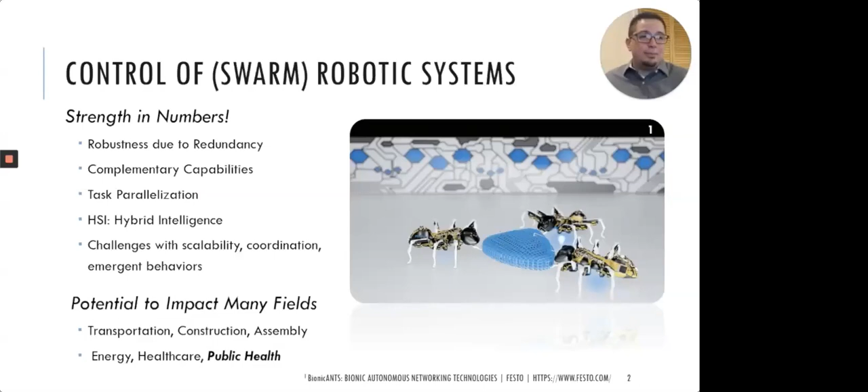In this particular work that I'm going to be presenting today, we're addressing the question of how do you manipulate a swarm of robots. And we try not to attempt to control individual robots with this work.

Instead, what we're going to do is set an objective for the collective of robots. And the individual robots then coordinate their motion with one another in order to achieve this collective objective.

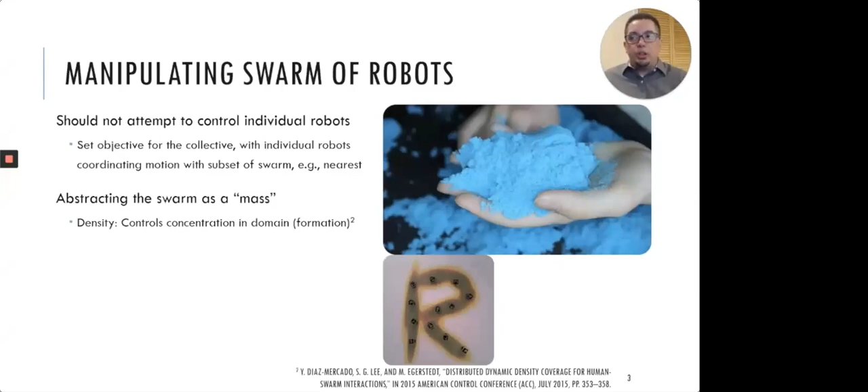We're grouping them together in some way in order to achieve different shapes. One approach to think about how you control these particles is by setting a density, the density of these particles, or in other words, you control the concentration of them inside of the domain. And in so doing, you might be able to achieve different formations like we see on the diagram here.

This is an approach that we have taken in the past. In this work, we're going to take a slightly different approach where we think about the boundary itself as the thing that we get to control. Kind of like taking the sand and then rolling it up into a ball, and actually being able to take this ball and move it around.

This is going to allow us to control the overall position and scale of the swarm. We're going to be using coverage control in order to do this, as it provides a scalable mechanism to influence the swarm of robots with these abstractions for the density and concentration of the robots, and the boundary, or the position and scale of it.

To formalize this a little bit, the coverage control problem over time-varying domains is the one that tries to minimize this modified locational cost H, which I will explain in a moment. It's modified in the sense that we are taking a time-varying convex domain D as the domain that we are attempting to cover. Inside of this domain, we're going to be defining a time-varying density phi.

It maps points in the domain and time to positive numbers. The larger these positive numbers are, the more important certain points in that space are. And the more important points in the space are going to drive the robots to concentrate around those points.

The objective is to minimize this cost with respect to the position of the agents. We're going to denote Pi of t as the position of the ith robot at time t. Whenever we see a position vector P without a subscript, that means it is the ensemble vector of stacked positions for the different agents, a long vector with all the positions.

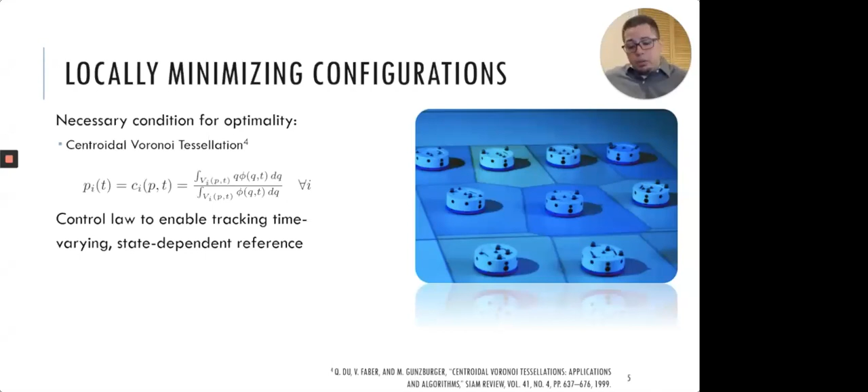Now, intuitively, from a controls theoretic standpoint, if we're just tracking our time-varying reference, then we need a few building blocks into our controller. First one is tracking feedback. This is pretty standard. Second one is tracking feed-forward. This is going to account for the time variations that we have from the domain and the density, and are going to allow us to then maintain this centroidal Voronoi tessellation once we achieve it.

Coordination among the agents is going to allow us to take into account the state dependency and the Voronoi tessellation that affects the domain of integration in order to, again, maintain this time-varying domain and density's centroidal Voronoi tessellation.

The coverage control law that we propose is given by the following expression. And it looks similar to expressions that we have proposed in the past, but there are nuances that are hidden here within the different partial derivatives that are unique to the problem that we're addressing here with the time variables.

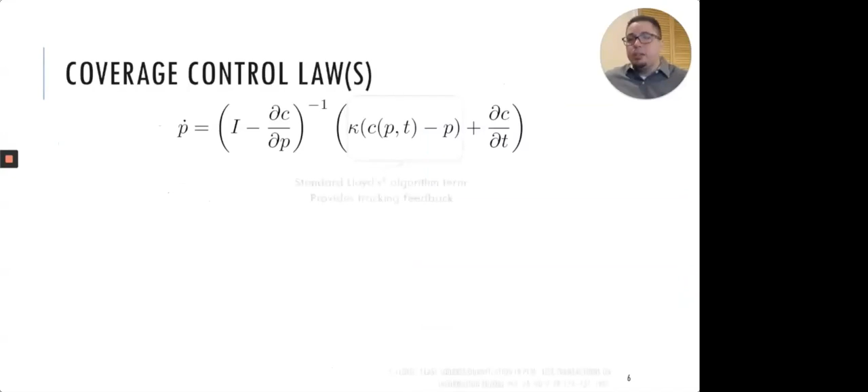But we can see that all the building blocks that we required in order to achieve this, maintain these centroidal Voronoi tessellations, are present. We have a standard tracking feedback term that actually looks a lot like the standard Lloyd's algorithm that's very well used in coverage control problems.

We have a feed-forward term, the partial of the centroids with respect to time, that accounts for the time evolution of these domains and the densities. And we have a matrix that accounts for state dependency here and provides coordination among the different agents.

In previous work, we've shown that this matrix can actually be swapped out with truncated versions of the Neumann series expansion in order to set the desired level of coordination among the agents and decentralize this control law.

For example, taking only the two terms in the Neumann series expansion would only require coordination between the nearest neighbors in the domain. And so in the paper, we show that the control law with the updated feed-forward terms and expressions are still able to provide local exponential tracking of the centroidal Voronoi tessellation.

To account for time-varying domains, we have the following proposition in the paper. It says that if we know the normal velocity of almost every point on the boundary of the time-varying domain, then the feed-forward term is given by the following expression.

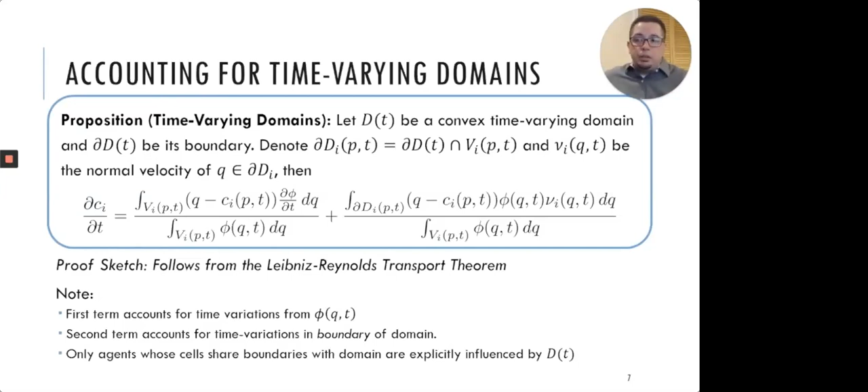The agents on the interior are not explicitly affected by the time variations. They're implicitly affected through the coordination between the different agents. And this result follows from application of the Leibniz-Reynolds transport theorem and a lot of algebraic manipulation.

So the scalability of this coverage control scheme was addressed in the paper as well. What we find is that under uniform density and 2D convex polygonal domains, the algorithmic complexity for our approach is actually constant in time.

In the paper, we show that we can find closed form analytical expressions for the case of uniform density, for every single term in the control law. These closed form analytical expressions are a function of the position of the neighboring agents in the swarm. In order to find these neighboring agents, we need to construct a partial Voronoi diagram.

There exist methods that allow us to compute these on average with a time complexity that depends on the number of neighbors.

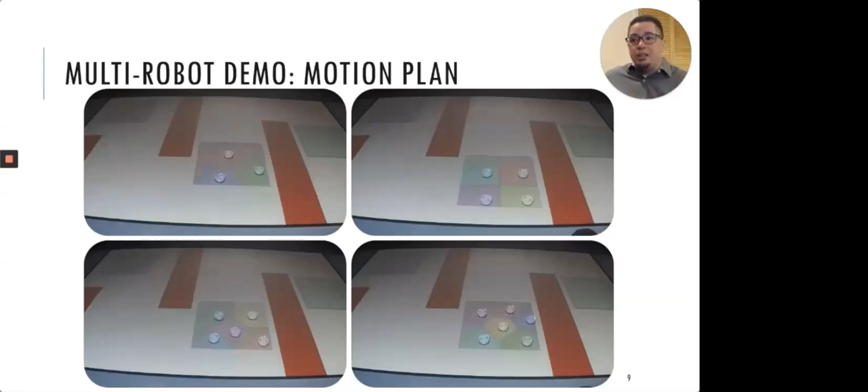What we see here is that through the control law and coordinating the position with the motion from the different agents, the agents are able to reconfigure as necessary in order to maintain optimal coverage and track the time-varying domain. In so doing, we're controlling the entire swarm of robots without having to worry about the individual robot in the space, and we managed to transport them from the left to the right while avoiding the red obstacle regions.

Here we are directly projecting the obstacles, domain, and everything else onto our workspace through an overhead projector.

We asked him to move the domain from the left to the right while avoiding the red obstacle regions. Sometimes he doesn't do very well and he ends up colliding with these.

And so we've infused the domain with the ability to avoid these obstacle unsafe regions.

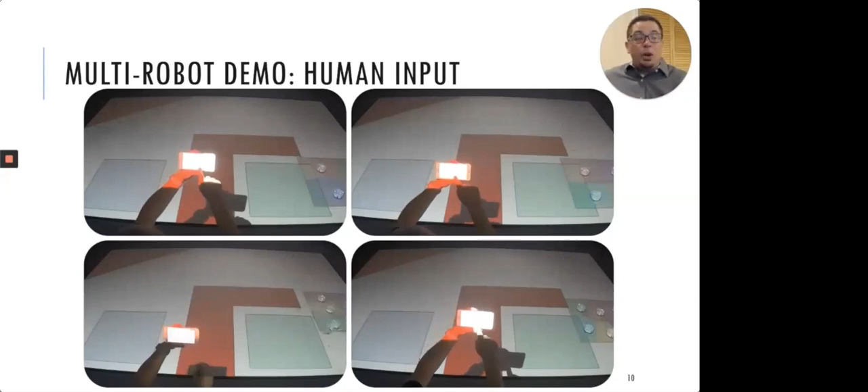This brings up an interesting feature: because the robots are always occupying the interior of the domain, it automatically provides a level of guaranteed safety for the robots, so that the robots are not going to go into the unsafe areas because the domain itself is not allowed to go into the unsafe areas.

So to conclude, we presented a scalable algorithm for manipulating a large team of robots via coverage control over time-varying domains, providing exponential tracking results to the locally optimal configurations.

We've shown that under uniform density, there are closed form expressions, which leads to a constant time implementation even for large teams of robots. The punchline here is that a time-varying domain and a time-varying density can serve as exogenous inputs to manipulate the swarm into executing motion plans or incorporating human inputs.

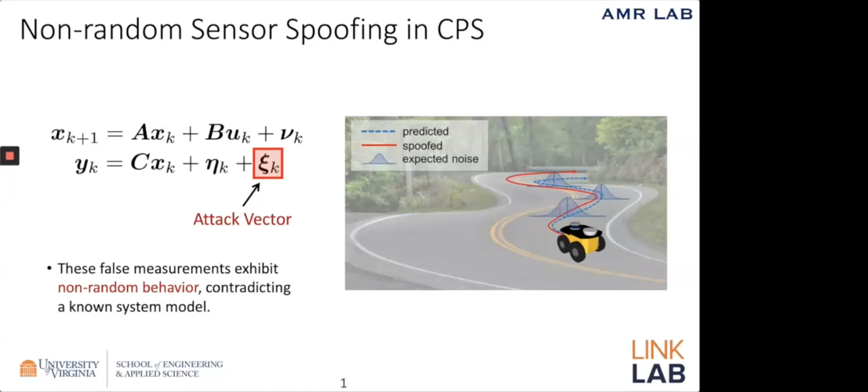Specifically, we leverage 2 tests to check for inconsistent behavior by monitoring the residual, that is the difference between measurement and the state prediction. The first monitor uses the Wilcoxon sign rank test to monitor whether the sequence of residuals are symmetrically distributed in zero mean, while the second monitor, that is a serial independence runs test, determines if the incoming residual difference sequence contains non-random patterns which may not be detectable by the Wilcoxon test alone.

In this video, we are showing an example of an experiment conducted on a UGV that is tasked to perform a square trajectory, avoiding the red regions while monitoring for cyber attacks with a Wilcoxon serial independence test and a well-known bad data detector. At some point, an attack on the IMU sensor appears, pushing measurements to one side and making the UGV believe that it needs to correct toward the left, thus entering that undesired red region.

However, as you can note on the top graph, the Wilcoxon test in this case is able to detect non-random residual behavior, resulting in an increased alarm rate. To hear more about this work, please visit our poster. Thanks.

Hello everyone, and welcome to my presentation. My name is Harshat Kumar, and in this video, I will be talking about the navigation of quadratic potentials with star obstacles. Path planning involves 2 components: reaching a specified target goal from a start configuration and remaining in the free space or avoiding obstacles along the way.

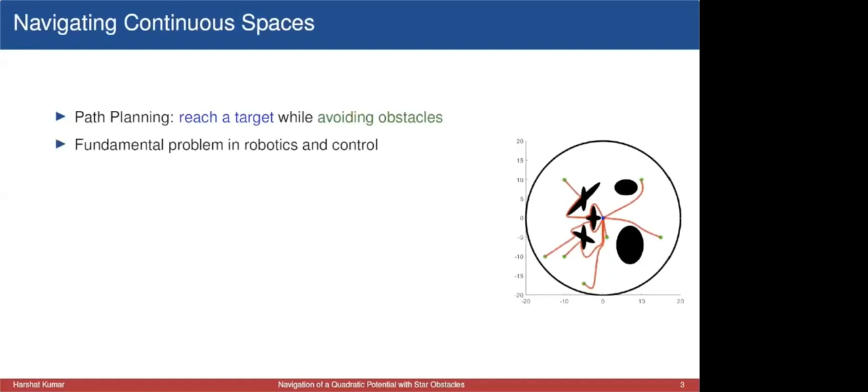Our approach is informed by the artificial potential approach. Artificial potentials combine an attractive potential to the target with repulsive potentials from the obstacles. The agent follows the gradient field generated by this artificial potential to reach the target.

This approach is popular as it can be implemented without global information and with smooth trajectories which are favored for bounded torque actuated robots. Unfortunately, artificial potentials are known to be incomplete, as the agent might converge to a local minimum of the potential rather than its goal.

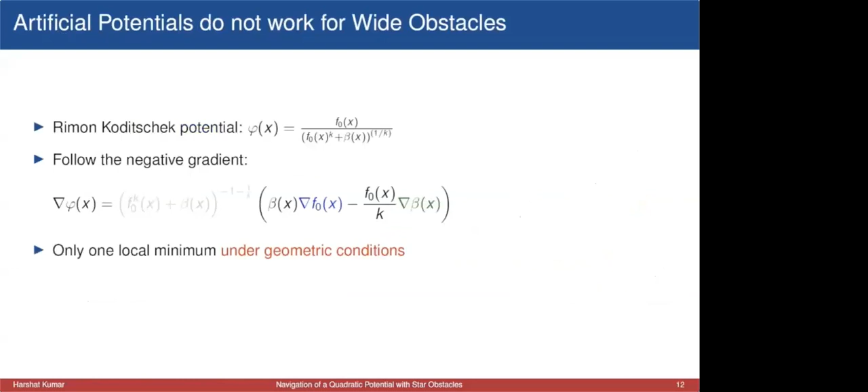Subject to certain geometric conditions, the Rimon-Koditschek potential can be proven to have exactly one local minimum at the agent's target. Spherical obstacles satisfy these conditions, but they lead to over-conservative obstacle estimates. When the obstacle is estimated by wider shapes, such as ellipsoids, a local minimum forms adjacent to the obstacle.

In fact, due to the quadratic form of ellipsoidal obstacles, the proposed dynamics are simpler than they appear. A closer inspection of these simple dynamics allows us to extend these convergence results beyond ellipsoidal obstacles.

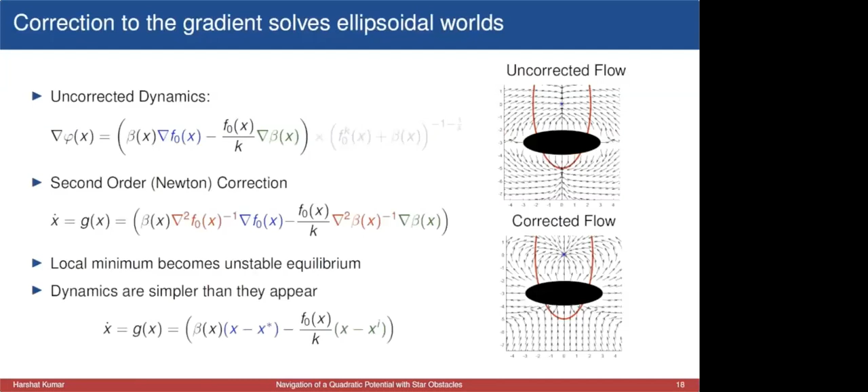Notice that x minus x star denotes the direction from the agent to the center of the quadratic potential. Similarly, x minus xi denotes the direction to the center of the obstacle.

As such, we propose the same simple dynamics can be applied to a more general class of obstacles called star obstacles. Star obstacles are defined by a center point such that the line segment between the center point and any other point is contained in the obstacle. In fact, all convex obstacles are star obstacles, with any point being a center point.

In this work, we proved that from any starting configuration, the agent will reach the goal without colliding with the star obstacles. Thank you for attending my presentation, and I look forward to speaking to you in detail during the interactive session.

Hello and very welcome to this short presentation on the model-based cascaded control concept for the bionic motion robot.

The bionic motion robot, which you can see on the left here, is a quasi-continuum manipulator consisting of 3 segments, actuated by pneumatic bellows. So it is a pneumatically driven robot, and it is actuated by pairs of bellows.

The title of the paper says, I will quickly present a model-based cascaded control concept, so as well the control concept, in very brief form in this short presentation.

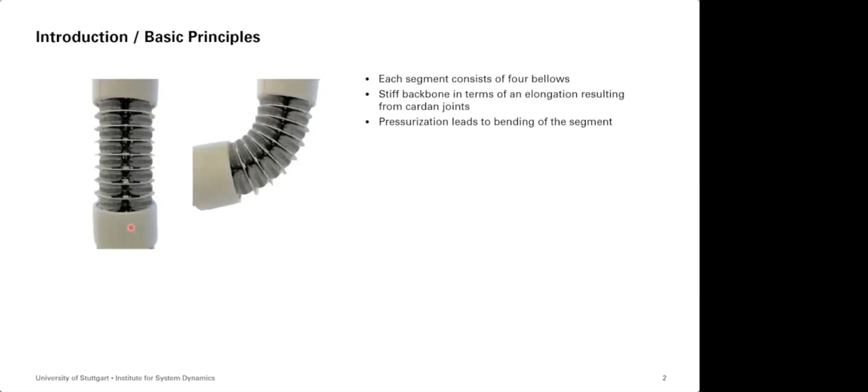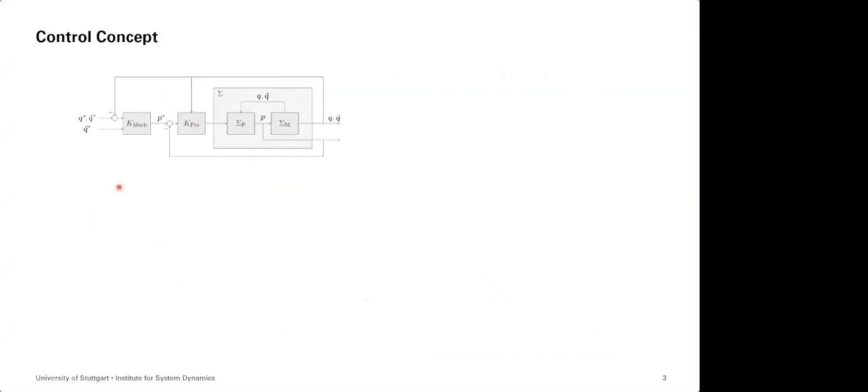Regarding the control concept, we used a cascaded control concept with an inner pressure control loop and an outer mechanical control loop, and optionally also a force-free control was implemented, which you can find in the paper.

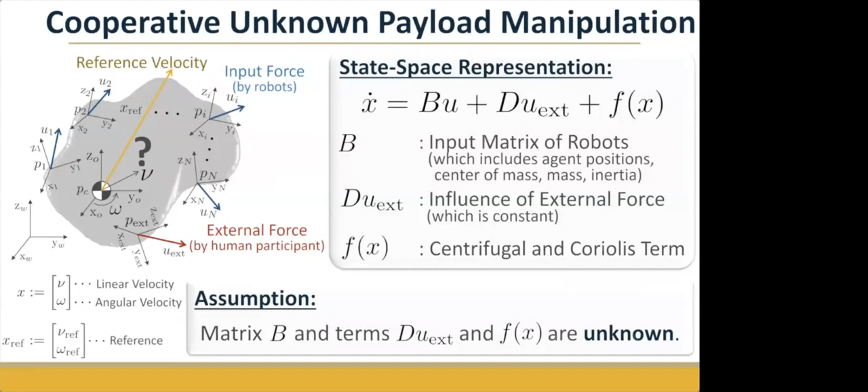This paper presents a novel distributed optimization algorithm based on primal-dual gradient dynamics. In general, we need to know the B matrix to apply the primal-dual gradient dynamics for this type of optimization problem.

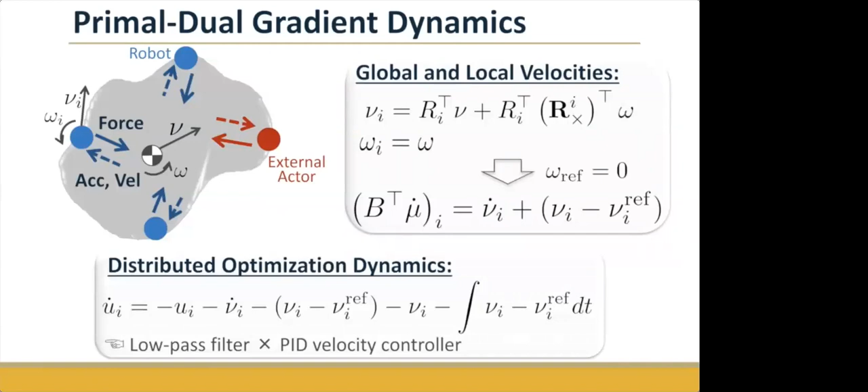However, the cooperative payload manipulation system has a suitable relationship between global and local velocities. By virtue of this suitable property, we can obtain fully distributed optimization dynamics with an additional mild assumption on the difference in angular velocity. Our manipulation scheme amounts to implementing a combination of a low-pass filter and a PID velocity controller.

As a main result, local exponential convergence of the present dynamics can be proved. Finally, we demonstrated the effectiveness of our proposed approach through numerical simulation. We can confirm that the object velocity converges to the reference, even after the decrease of the number of active robots.

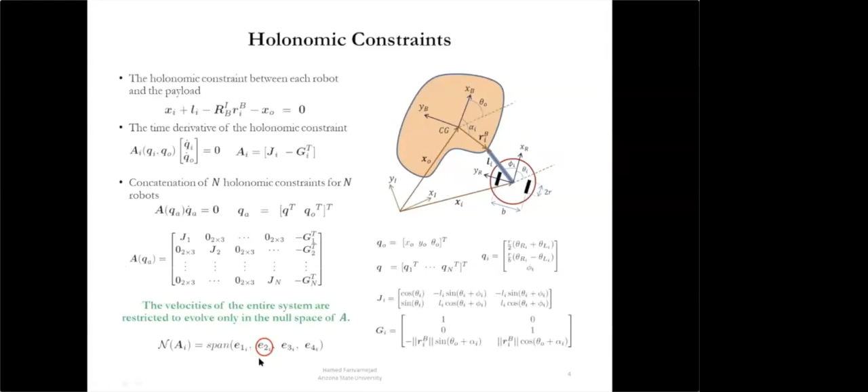This null space is spanned by four unit vectors, and among all these, E2 has a circle, because when we want to design the desired velocity for each robot, we use just E2 to design this desired velocity. When we design the desired manifold motion with this equation, we can prove that with this desired manifold, all the control objectives are entirely satisfied.

With this linear parameterization of the robots, we can design a totally decentralized control law and adaptive law, and we can prove that the closed-loop system is globally stable, and all the manifold parameter errors converge to zero with this control law.

We did a simulation in V-REP with eight robots, and we can see that the payload here is transported to the goal with a desired constant direction without significant rotation.

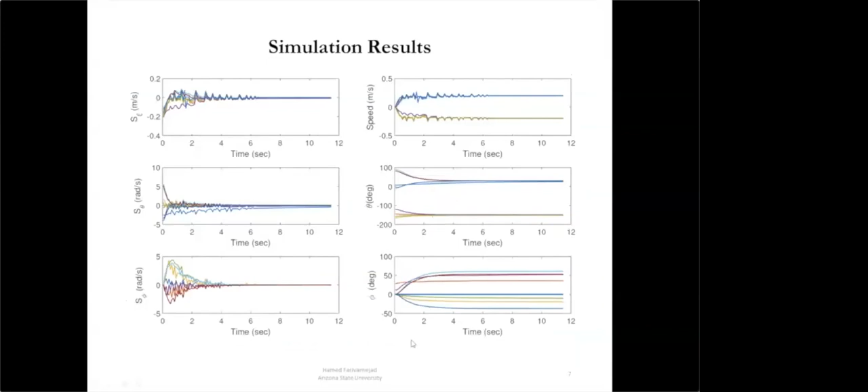Backing up a little bit, the goal of multi-target tracking is to estimate the state of a given dynamical system. This is usually performed in two steps recursively: uncertainty forecasting and information fusion.

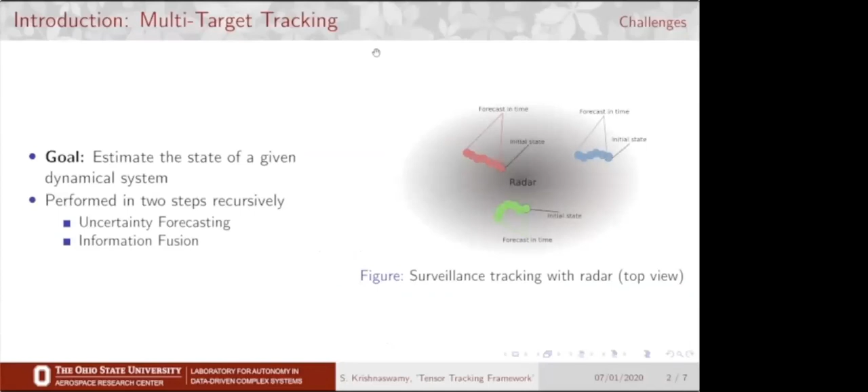The problem with the latter step is that targets often do not voluntarily reveal their information regarding the state, and we need this information to determine which measurement to use for which target to perform a state update. This is complicated by the presence of clutter and compounded by the scale of the problem. This is known as the data association problem, and there are many solutions that exist for it.

I'm going to be focusing on one here. To formalize this a little bit, this is the multi-target nonlinear motion model we're using in this paper.

I want to draw your attention to three things here. First, the number of targets, which is more than one. The state of the object is given by a nonlinear process model. And finally, z-tilde of p, which is the measurement needed to compute the state.

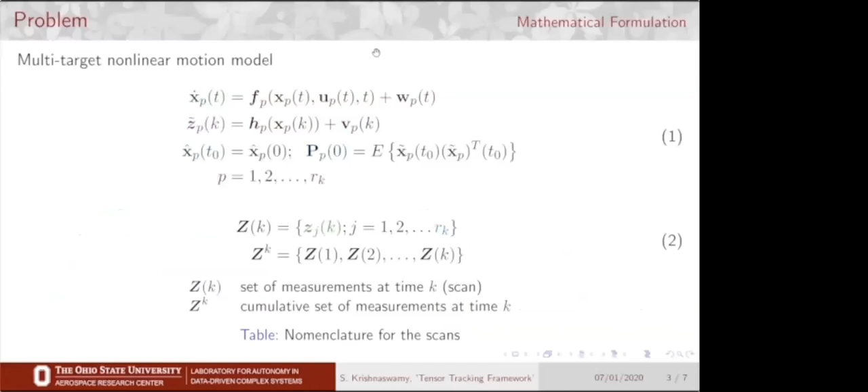But what we get in a practical scenario is zj of k, and we need to reconcile these two somehow, and data association is how we do it. The way data association is performed in this paper is by using DJPDA, which is a tensor framework that was developed and published earlier. I'm not going to go deep into this one, but I just wanted to mention that.

The experimental design here uses a fleet of turtlebots. The objective of this case study was to control the complete tracking problem and to test the DJPDA framework already published, to see how it fares in a real-world scenario with clutter and higher data frequency.

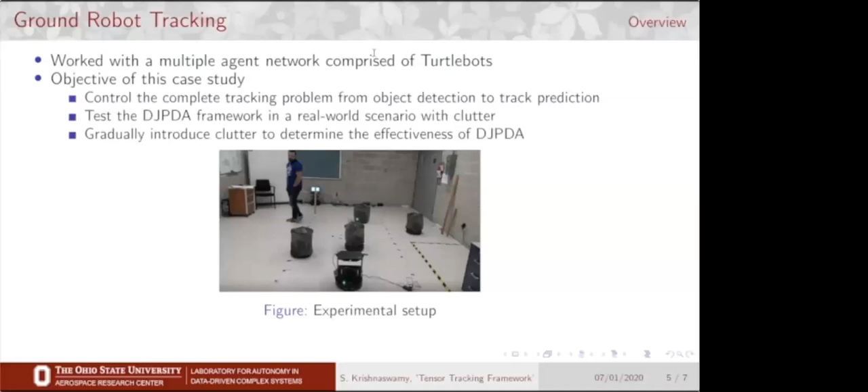The experiments were conducted in a gradual manner, starting with one agent. Complexity was added by including additional agents with the same process model, an undesired object with a different process model, clutter with an unknown trajectory, and random interference using humans.

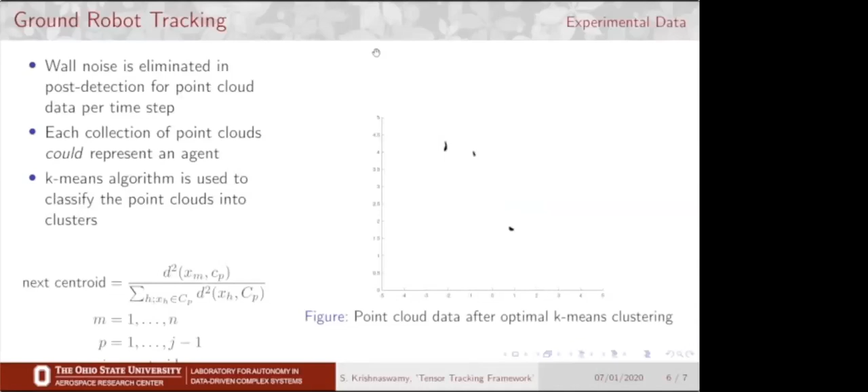We also did some simple data cleaning. We eliminated wall noise because we knew the wall was at a known position. We also took into account the point clouds and ran a k-means clustering algorithm to determine what position each point cloud represents, which would be a turtlebot position.

Once a rank is set, that time is also set, and the uncertainty reduces with the number of ranks. Together, this gives us an additional tuning parameter.

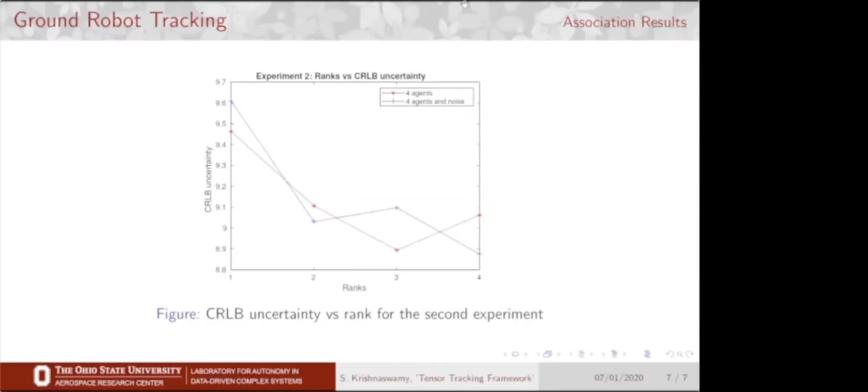First let's define material handling, which is the use of manual, semi-automatic, and automatic equipment to transport, store, and handle various materials. To successfully assist, humanoids should be able to interact with common materials-moving equipment such as carts, dollies, and wheelbarrows, and that's what we're going to focus on here.

There are a lot of applications within disaster cleanup and agriculture. We will be using the DRC Hubo robot, which was developed during the DARPA Robotics Challenge.

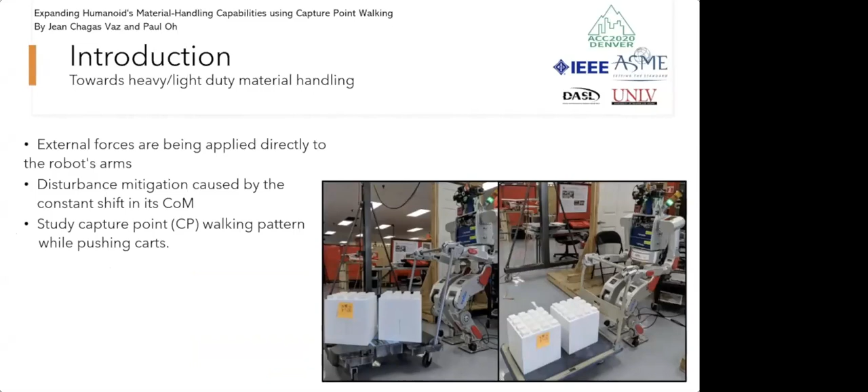The first thing we have to consider when talking about pushing a cart is the external forces. For the walking pattern, we have chosen capture point.

Here I have a little bit of the system integration. DRC-Hubo was equipped with 4 force-torque sensors on the ankles and wrists, and PODO is just the overall software that communicates between those sensors.

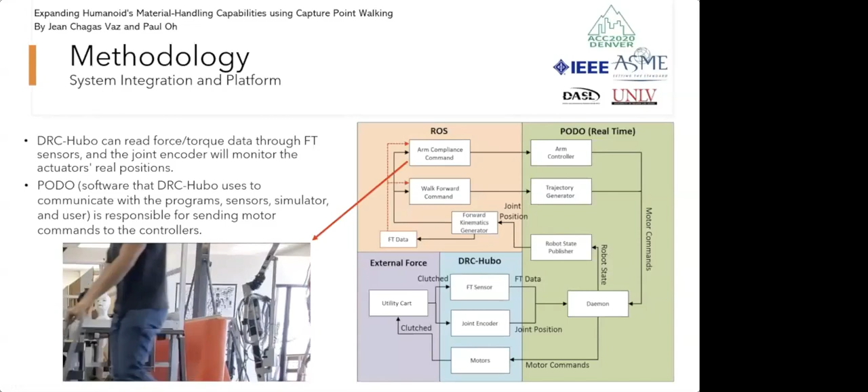By observing humans pushing carts, we've noticed that arm compliance is quite a must if you want the robot to push the cart and walk at the same time. For that reason, we have applied arm compliance based on friction.

To solve that problem, we had to ensure the desired wrist position for the high dimension nonlinear robot arm, and we used a traditional feedback linearization based technique.

The robot is capable of keeping stable walking even though the cart is constantly shifting its center of mass. You can also observe the arms are indeed using friction compliance to push this cart.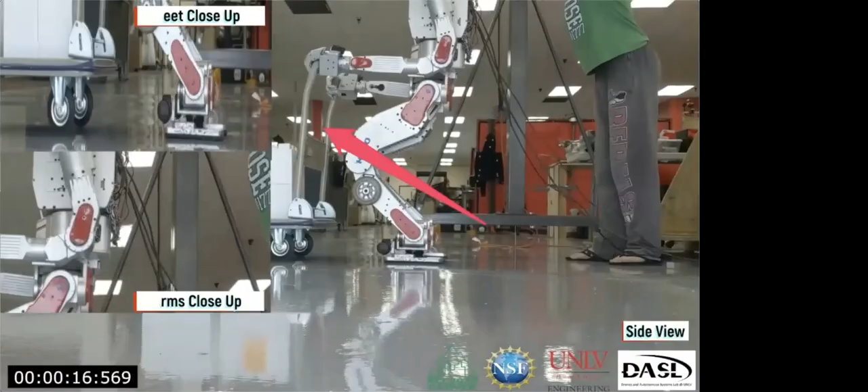This is one of the carts that we used. There was another cart where the handle is 90 degrees and upwards, and we're going to show that right here. The capture point pattern stabilizes itself as the walk goes, as you can see on the overall plot. Same thing can be seen on the Y ZMP.

The takeaway from all of this is that cart pushing and material handling remain an open problem. The robot-object interaction easily destabilizes walking, so this problem has to be solved before humanoids are deployed in distribution centers and disaster cleanups. We have successfully demonstrated capture point walking with arm friction compliance, so the next logical step is whole body coordination, and that is coming up soon.

Hello, I am Ryan Krauss, and I am really interested in low-cost, real-time feedback control experiments. That has led me to publish some previous work on using Arduinos for real-time feedback control. But I also really love Python and would love to be able to use it in real time to do my control law calculations. I think it gives me a lot of power and flexibility.

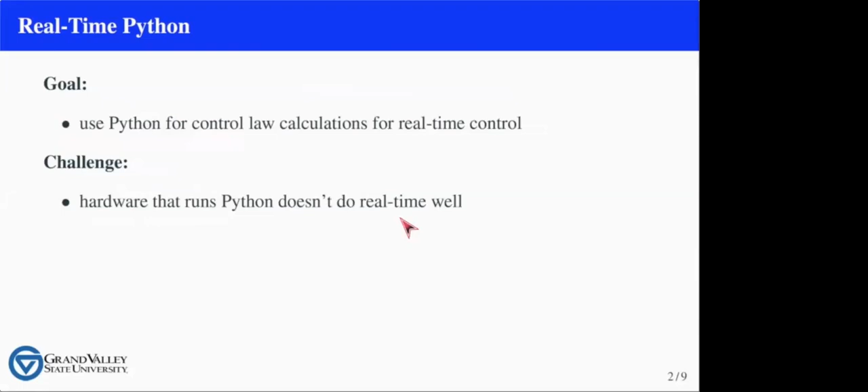The primary challenge I run into is that hardware that runs Python does not generally do real-time stuff very well. So in my previous work, this has looked like an Arduino connected to a laptop, and the laptop does the control law calculations and sends information to and from the Arduino over USB. The Arduino controls the timing and interacts with the plant, reads the sensors, and sends the actuator commands using digital to analog conversion.

In this work, we're switching from a laptop to a Raspberry Pi, and we're switching from serial to I2C as a way to reduce latency.

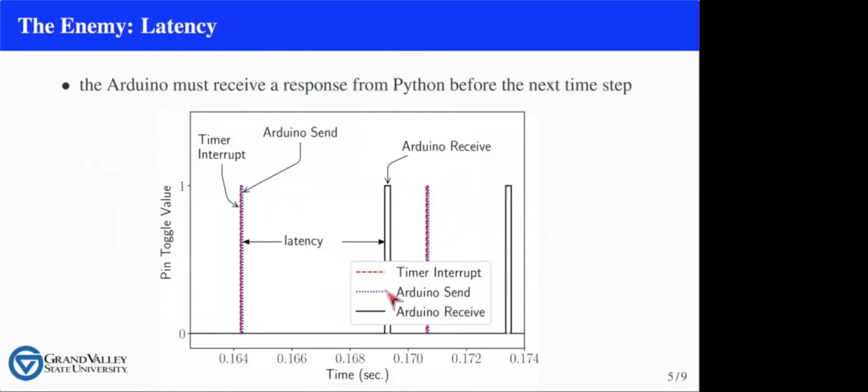In previous work, Python essentially sits waiting for a response from the Arduino. As soon as it gets the sensor values, it does its control law calculations and sends out a new set of commands. The Arduino waits for a timer interrupt, sends those commands to the plant, and then sends data back to Python. The primary bottleneck in this situation is how long it takes from the time the Arduino sends sensor information until the time it receives the next batch of actuator commands.

That latency can average around 3 milliseconds and be as high as 5 or even slightly over 5. That bottleneck limits this approach to roughly a 200 hertz digital control frequency. So reducing that latency was the primary goal of this work.

It basically came down to serial having latency that I don't seem to be able to get rid of. So switching over to I2C and using 2 different Arduinos allowed Python to ask the timing Arduino when the next timer interrupt event occurs. In this communication cycle, we're essentially doing the same things, but doing it over I2C has much less latency than the serial-based approach.

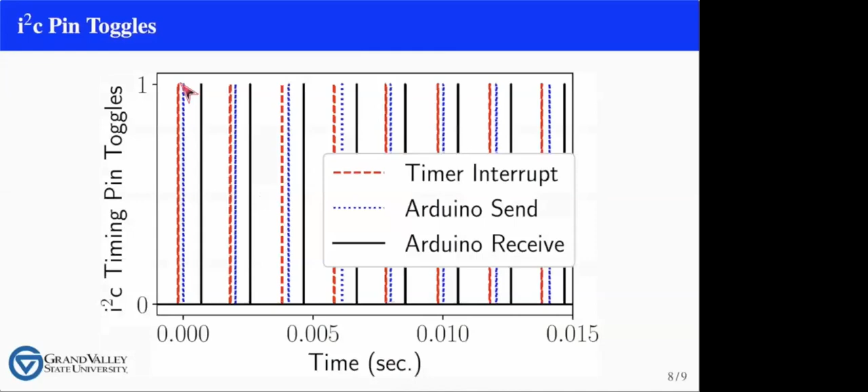Using pin toggles from the Arduino combined with an oscilloscope, we measured the latency of this approach in the same way we had done with the USB serial approach, and we find that we've reduced that latency by roughly a factor of 3, which should make it possible to do real-time feedback control experiments using Arduino plus Raspberry Pi at roughly 500 to 800 hertz.

Hello, my name is Sean Brennan, and I'm pleased to present this paper, Energy-Aware Path Planning for Skid-Steer Robots Operating on Hilly Terrain. The lead author of the paper is the recently graduated master's student, Veronica Grunge, and my co-authors are Jesse Pentzer and Karl Reichard.

The problem we are seeking to solve in this work is represented by the human challenge of climbing a mountain. The minimum distance path is a straight line toward the peak, whereas the minimum energy path is often complex, longer in distance, and generally seeks to minimize changes in elevation.

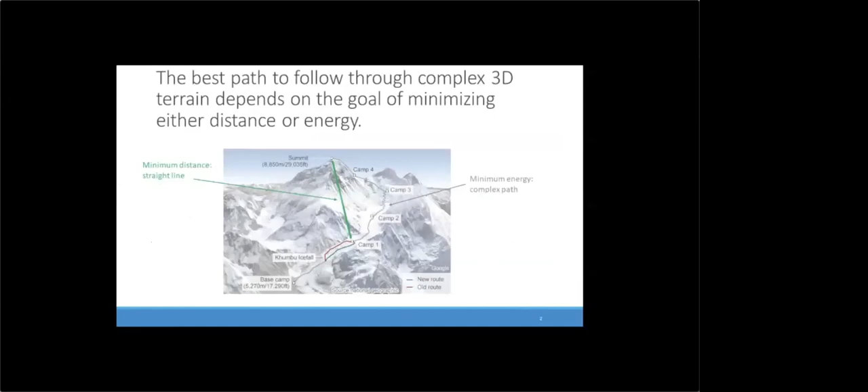While minimizing distance from a start to end point is a relatively trivial task of connecting straight line segments, the calculation of minimal energy paths is made difficult for off-road skid steer vehicles due to the calculation of slope energy and spin-in-place energy in the presence of deformable or slipping soil surfaces.

Prior work by the authors shows means of modifying the two-wheel unicycle robot dynamics to include skid steering effects. These dynamics are based on the instantaneous centers of rotation rather than the center of the tire or treads.

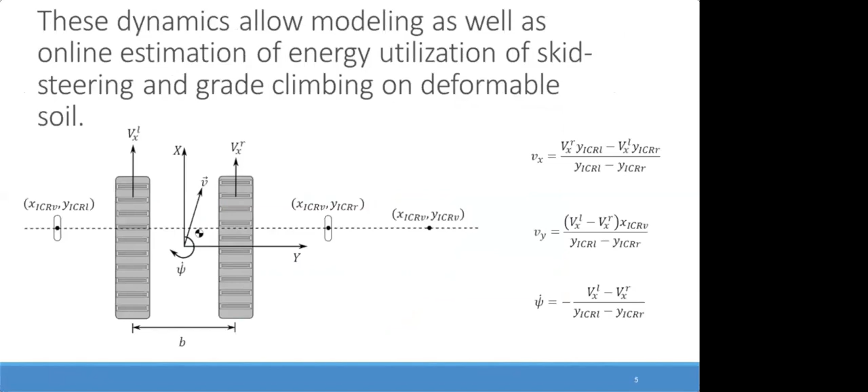This modification allows straightforward modeling as well as online estimation of energy utilization of skid steering and grade climbing on deformable soils. The problem of finding the minimum energy trajectory in hilly terrain is a non-convex problem, particularly with changing soil frictions. To obtain solutions, this work uses the sampling-based model predictive optimization, or SBMPO algorithm, with models of terrain topology and soil parameters to develop energy-aware path plans.

The results show that using homogeneous soil navigation with energy constraints predicts paths that follow ridge contours, whereas straight paths are preferred if the soil types are improving energy costs.

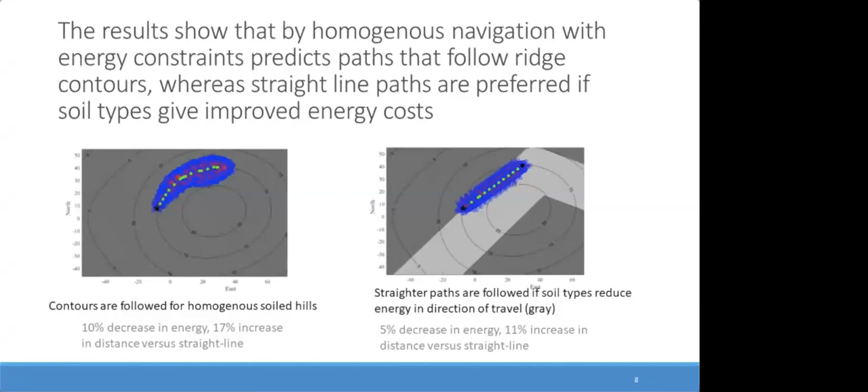In the homogeneous soil case, we observed a 10% decrease in energy, but with a 17% increase in distance versus straight line driving. In the changing soil case, we observed a 5% decrease in energy, but with an 11% increase in distance versus straight line driving.

Future work includes more aggressive topologies, speeding up the algorithm, which is currently not real-time, and experimental testing of the algorithm with real robots. If you have questions, I'd be glad to discuss in the breakout session, or you can email me, Sean Brennan, at this address.

Hello everyone, my name is Yuan Gao. I'm a PhD student from the Trace Lab at the University of Massachusetts Lowell. In this presentation, I will talk about our research on impact-aware online motion planning for fully actuated bipedal robotic walking.

This work is done with Dr. Xingye Da from NVIDIA and my advisor, Dr. Yan Gu. Real-world operations in complex, dynamic environments demand online planning.

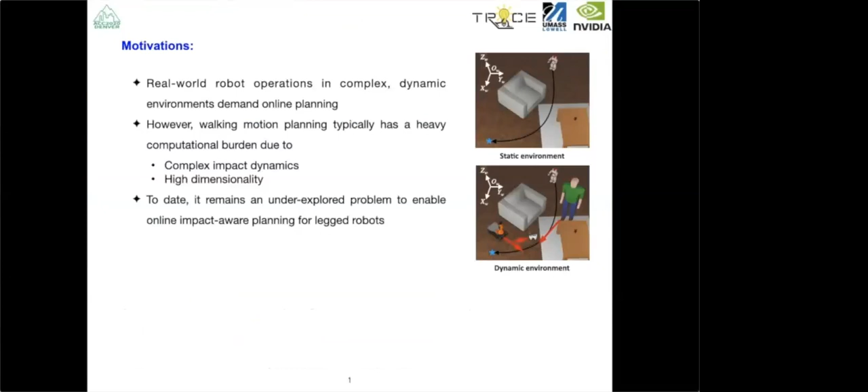However, the computational burden of the associated walking motion generation is heavy because first, walking is naturally a hybrid dynamic process involving nonlinear state-triggered impact dynamics, and second, a walking robot typically has many joints causing high dimensionality of the robot's state space. Therefore, realizing online impact-aware planning for legged robots remains a challenging problem.

The objective of this work is to develop an impact-aware planning method that generates a desired full-body motion profile in real time for fully actuated walking robots.

Our proposed planning method reduces the computational burden of planning by constructing a keyframe posture library offline. Also, it guarantees that the planned motion respects the robot's landing impact dynamics by explicitly considering the impact behavior.

The flowchart illustrates the proposed planning method, which consists of four steps. The first step is to construct a keyframe posture library. A keyframe posture is a pre-computed kinematically feasible configuration of a walking robot when the foot lands on the ground.

The postures highlighted in the red dashed circles are keyframe postures. A keyframe posture library is a collection of keyframe postures.

The second step of the proposed planning procedure is posture interpolation, which obtains a posture that exactly fits the given footstep. Specifically, we first search for two closest keyframe postures, then we obtain the average posture and use it as the initial guess to obtain the interpolated keyframe posture.

The third step is the velocity assignment, which is the key step to enable our planner to generate full-body motions that respect the robot's impact dynamics. At this step, we assign the desired generalized velocity to the interpolated posture obtained from the previous step.

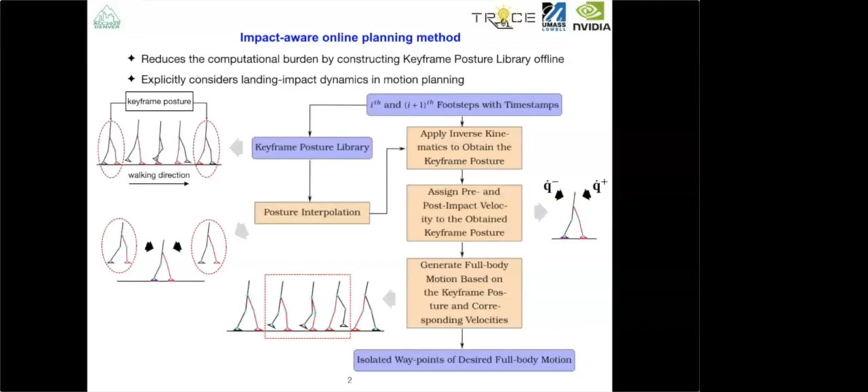In the last step, the planner generates a full-body motion based on the keyframe posture and its corresponding velocities.

We have validated our impact-aware online planning method through MATLAB and Webots simulation of the Darwin OP3 robot. The robot has 20 joints. Our planner is able to generate impact-aware motion of one walking step within 0.6 seconds.

In these simulations, the nominal step duration is about 0.8 seconds. Both simulation results demonstrate the effectiveness of our proposed planner in generating impact-aware motion in real time. Thank you, I'd be happy to take any questions during the post-session.

My name is Antonio Loria. I am with the CNRS France, and I will speak about the decentralized partial consensus controller for non-autonomous vehicles over networks with interconnecting delays. This is a joint work with Mohamed Maghenem from University of California, Emmanuel Nuño from University of Guadalajara, Mexico, and Elena Panteley from CNRS France.

Partial consensus control pertains to the case in which we have a group of robots that are initially far apart, and we want them to converge to a rendezvous point that is not specified a priori.

In doing so, the robots also have to acquire a formation, a geometric pattern, and a desired predefined orientation. Only orientation is predefined. We address this problem under the realistic scenario in which the robots are initially far apart, so proximity sensors are inefficient, and instead the robots use GPS measurements, and they transmit these measurements over a wireless network.

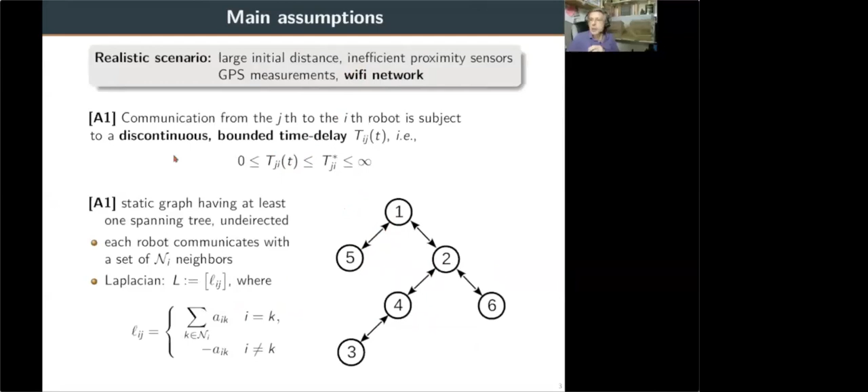This network is supposed to have at least one spanning tree so that every robot receives information from at least a sufficient set of neighbors. Also, because the network is wireless, it induces discontinuous time-varying bounded delays.

The controller to solve this problem is given by these two equations, one for the translation motion and another for the orientational motion. As you can see, the controller contains proportional errors to the consensus errors we see here. These are the states of the ith agent, the actual agent, and these are the states of the neighbor that are received with time-varying delays.

Another term that is crucial in the controller is this one here, which is the product of a function that depends only on time. It's an external function, and this function is supposed to be persistently exciting, so it can be a periodic function, or just some random noise, or any other function that is persistently exciting. The second term is basically some kind of norm, except that it's in a vector form of the error.

So what this term is doing is that it excites the system dynamics as long as the consensus errors are delta away from the origin.

Our main result is to establish uniform global asymptotic stability, and this is very important. This is very different from the literature, in which usually only convergence is established.

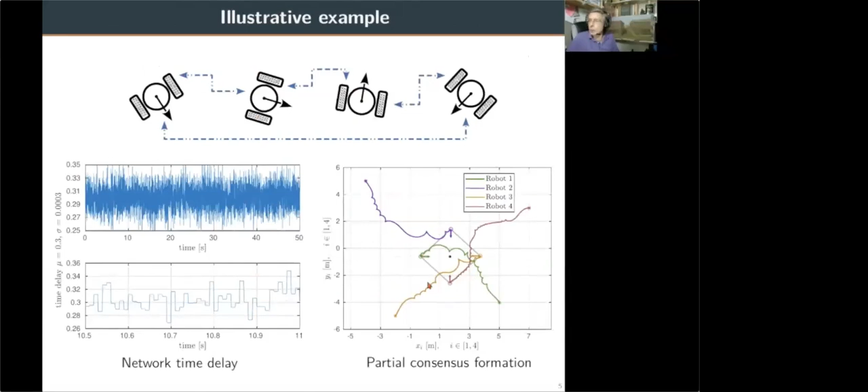We also provide an illustrative example of four robots communicating in this loop fashion with random delays, and you can see that all the robots converge to the consensus point. I will leave you with these references to probe further.

Hello, I'm Evan Krell, presenting Game Theoretic Potential Field for Autonomous Water Surface Vehicle Navigation using weather forecasts.

Instead of shortest distance, marine path planning is often based on energy efficiency, such as the impact of water currents along the path. These velocities may be obtained from water current forecasts, but are only uncertain predictions. We are using a game theory approach to handling this uncertainty.

The boat and weather are said to be opponents in a game where the boat wants to minimize energy expenditure, and the weather wants to maximize it. Of course, the weather has no opinion, but the model promotes worst-case planning.

The major contribution is robust planning with online weather forecasts. Dynamic programming is used to generate a policy across the entire planning region, and game theory is used to determine the actions of the players at each decision.

Dynamic programming theoretically requires a vast number of iterations, but we are interested in the convergence rate and how many iterations are actually needed for a useful real-world policy. Here's a quick look at the dynamic programming. We start from the goal and solve it bottom up so that even the first iteration has a feasible solution.

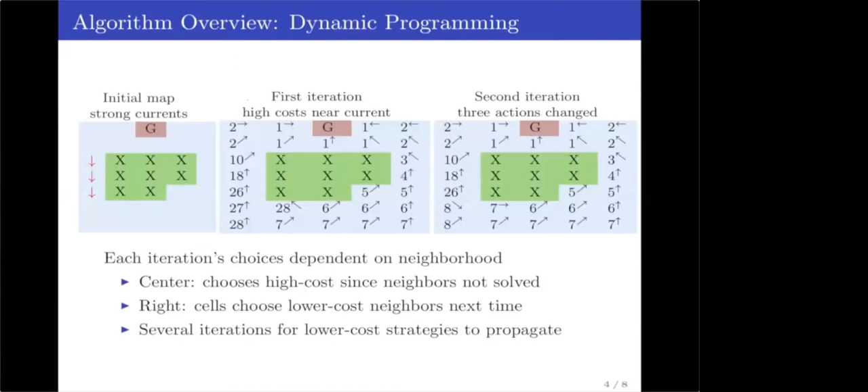Here we see that the first iteration has actions that go directly against the strong current shown in red. In the second, some of those cells can now see that there is a lower cost route by going around the island. The uncertainty is addressed by solving a zero-sum two-player game at each cell.

Here, the vehicle is shown with having the actions up, down, left, right, and halt, but the actual code uses 16 angles. The game's minimax solution describes the action for both players, and the cost for the robot to traverse that cell, assuming that all future actions follow the current policy.

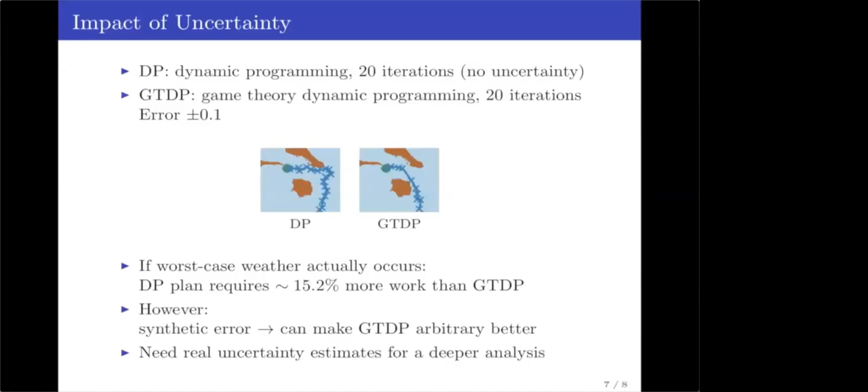15% work is saved if the worst case were to occur. However, these models tend to have sparsely published error reports, so the error margin is synthetic here. Raising it, game theory becomes arbitrarily better.

So we want to learn an estimate of the uncertainty with the boat, who then becomes a local domain expert over its lifetime of missions. Game theory allows planning for worst-case weather, and the convergence suggests useful plans from few iterations.

However, we are also interested in applying approximate dynamic programming and focused Markov decision process techniques for getting plans without searching the entire space. Thank you very much.

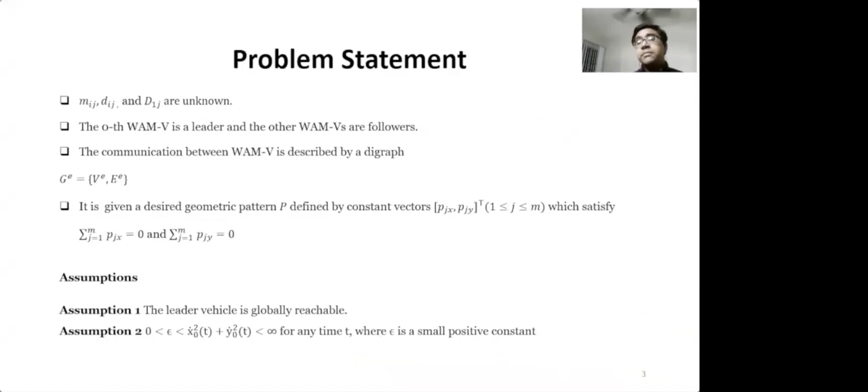So the formation control problem is to design distributed control laws so that the equation 7 to 9, which is described, is satisfied.

So we propose distributed controllers through backstepping technique by equation 10 to 12. In these equations, we can see there are some derivative terms present, M3 and M5. So these derivative terms make the implementation of the controllers complicated.

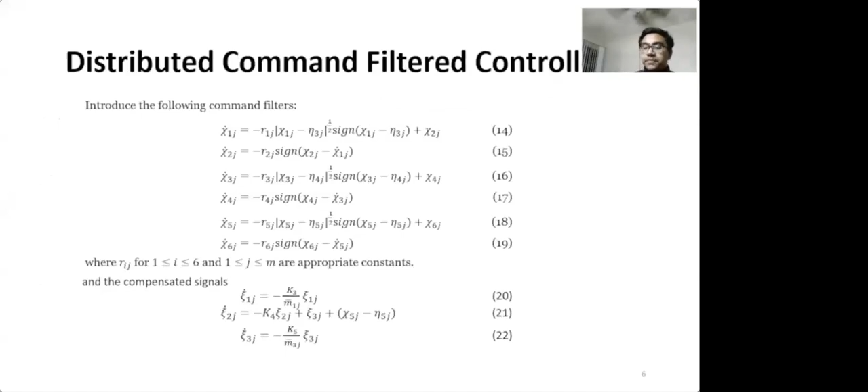So in order to remove the derivative terms, we propose distributed command filter controllers through equation 14 to 19 and through compensated signals 20 to 22. Through these equations, we propose two distributed command filter controllers FR and FL, which make the computation really easy and also remove the derivative terms from the signals.

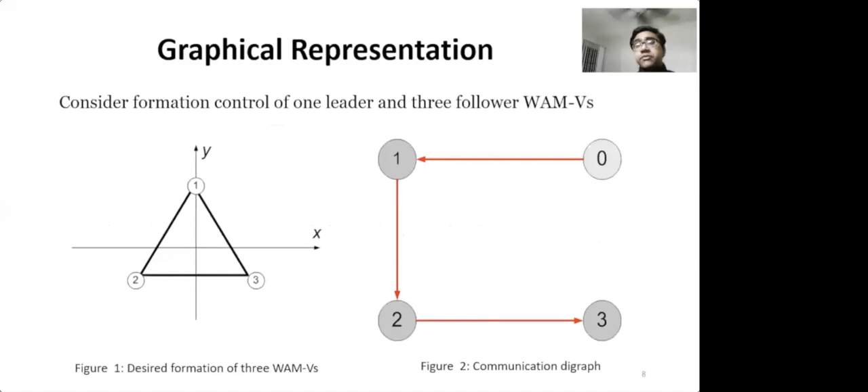If inertia parameters are not exactly known, distributed robust tracking laws were proposed. To reduce the computational load in controller design, distributed command filter controllers were proposed. Simulation results show the effectiveness of the proposed results. Thanks a lot for hearing me out.

Hi, I am Lasita. This paper presents an experimental investigation of bilateral teleoperation of soft robots under piecewise constant curvature hypothesis. Soft robots are continuously deformable robots that are hyper-redundant and are fabricated using compliant material.

The interest in soft robots has been due to their unique properties which could be used for safe operation in various applications. Despite being challenging, researchers have proposed several reduced order models as well as some infinite dimensional models for these robots. Although soft robot control has expanded recently, bilateral teleoperation of soft robotic systems hasn't been addressed much.

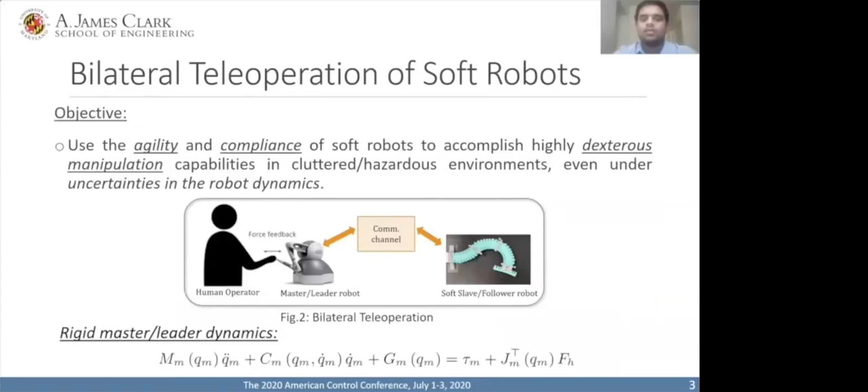Thus, in this paper, we exploit the soft robot's capabilities for dexterous manipulation through teleoperation using a rigid master manipulator and a soft slave robot. The dynamics of the rigid robot is obtained using the usual Euler-Lagrange form.

For the soft robot, we will use the recently developed augmented formulation. Here, the robot is assumed to be PCC and the dynamics are obtained in the familiar Euler-Lagrange form. However, there could be uncertainties in the parameters due to various reasons. Thus, the proposed control framework will be designed to mitigate such uncertainties.

Therefore, we choose an adaptive control framework. The control objective is to track the robot tip positions. To this end, the control inputs are computed for both the robots. Also, null space velocity of the soft robot is utilized to achieve subtasks.

The experimental setup consisted of a pneumatically actuated pleated-type soft robot with 3 segments, a motion capture system, and a laptop to run the control algorithms.

Due to the unavailability of a suitable rigid master manipulator, it was simulated.

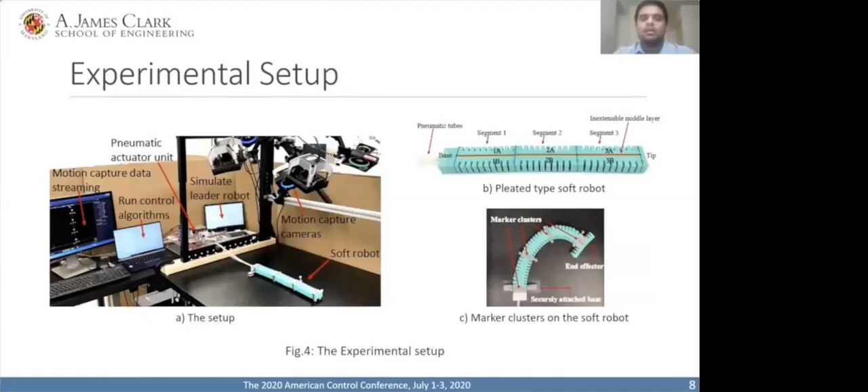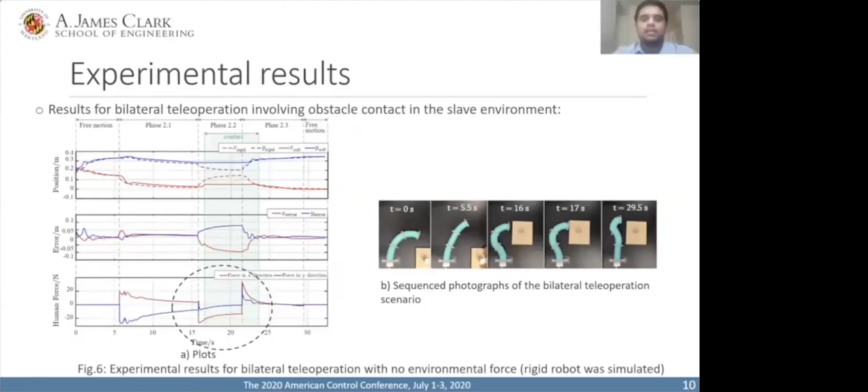In the second experiment, an obstacle was set. The results illustrate that when the soft robot is in contact with the obstacle, the environmental forces are felt at the master side. Among the important insights, it was observed that the slow movement of the soft robot negatively impacted the performance of the teleoperation.

This might have been due to the nature of the pneumatic actuation or due to the hysteresis. Excess input signals were observed due to local singularities. Also, although the stiffness and damping of the soft robot were considered constant, they might have been varying.

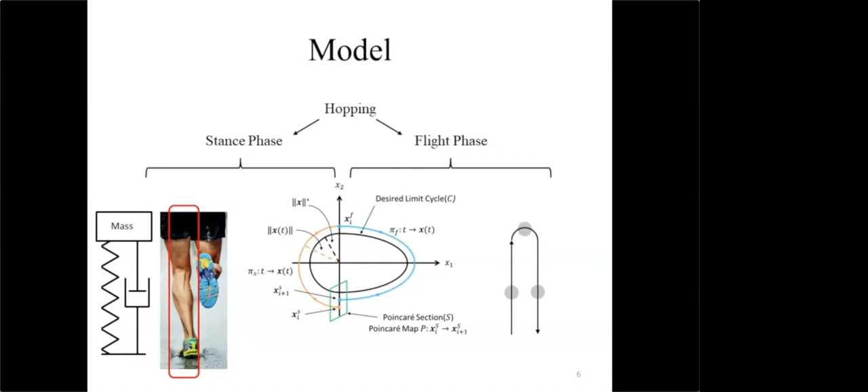In stance phase, we can describe the simple spring mass damper system with a standard second-order differential equation as shown. With some substitutions and rearrangements, we can represent the system in a matrix form, in which the state vector x1, x2 contains the height and the velocity of the mass.

When we compute the time derivative of the two norm of the state vector, we can observe the decrease in magnitude in time without control, and the state vector will eventually be attracted to the origin. We try to use a controller that can regulate the two norm of the state vector such that the state vector will converge to the desired circle and hence the desired hopping height.

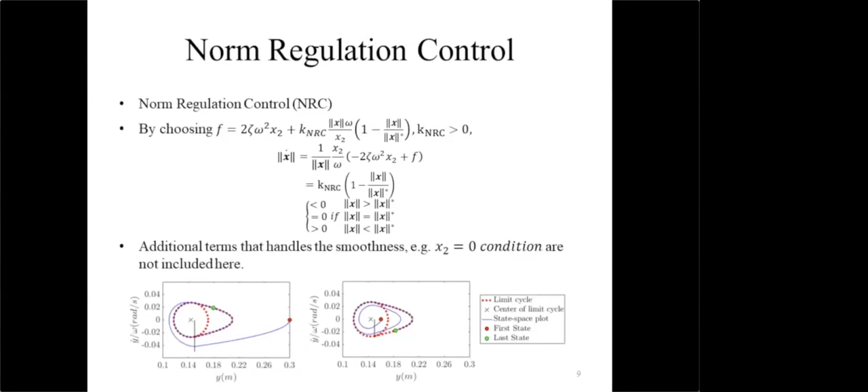The two figures show the simulations of inward and outward convergence to the limit cycle. The first simulation shows the mass converges to the desired height from a high altitude. This state space plot shows that the state vector converges to the desired limit cycle, which is in red dotted line, once it enters the stance phase.

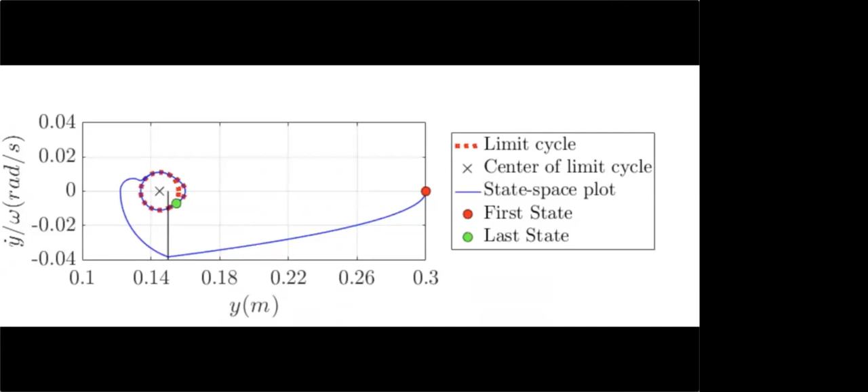The second simulation shows the mass converges to the desired height from a low altitude. Below, I am going to show some experimental results of the implementation of this controller. Firstly, we tried it on a hard contact surface. We can see the system converges to different height quickly. Secondly, we tried it on a soft foam block.

With model uncertainty, the system was still able to converge to the desired height. In summary, the controller is effective in controlling the hopping height with a fast converging rate, and the controller is effective even if the system is not perfectly matching the model.

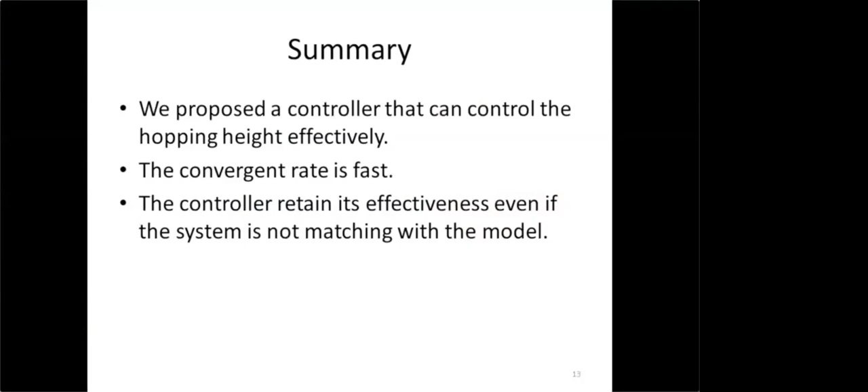Hello, my name is Andreas Papadimitriou, and I will present the work of our group with the title Experimental Evaluation of an Explicit Model Predictive Controller for an Adhesion Vortex Actuated Climbing Robot.

In an effort to enable the autonomous inspection of climbing robots, the CompInnova project proposes a novel climbing robot for the inspection of aeroplane composite fuselages.

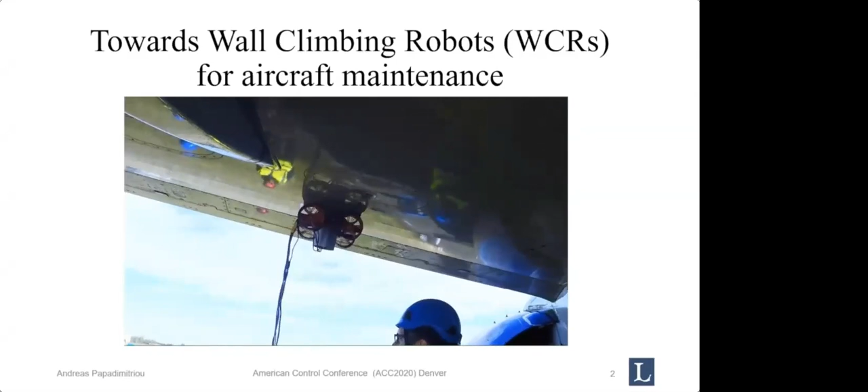The robot is differentially steered with the ability to remain attached on non-ferrous and ferrous surfaces under any orientation. The platform can generate up to 7 kg of force, enabling the ability of carrying multiple tools for inspection and repair purposes. The robot is able to translate to both curved and flat surfaces and weighs approximately 1.7 kilograms.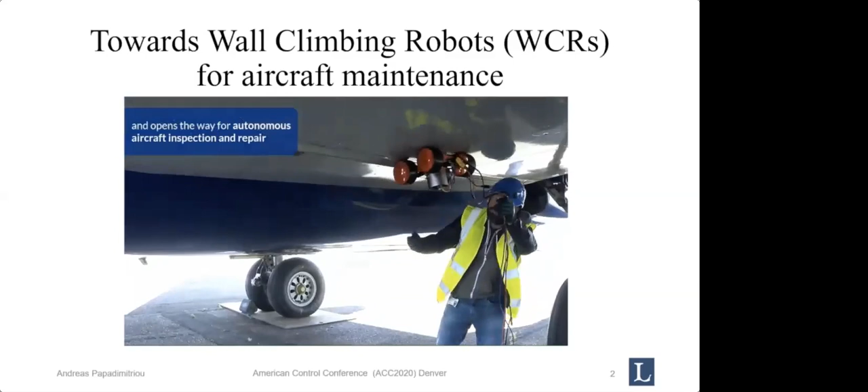In addition, it is able to provide smooth and accurate motion performance and has the ability to translate over the different curvatures of the aeroplane, while utilizing multiple sensors for the motion of the vehicle and sensing of the generated force. This opens new ways for autonomous aircraft inspection and repair.

Through the various ways to achieve adhesion, this project focuses on negative pressure vortex adhesion generation, utilizing an electric ducted fan known as EDF. The difference in pressure under the cavity of the EDF and its surroundings will induce an adhesion force onto the target surface.

There are many variables that affect the maximum generated force, such as the size of the shroud and its distance from the target surface. Noise and nonlinear characteristics such as hysteresis make the adhesion control a challenging task.

To tackle the identification challenge due to the high complexity of the vortex aerodynamic effects, an ARMAX identification is selected for the modeling of the vortex actuation system.

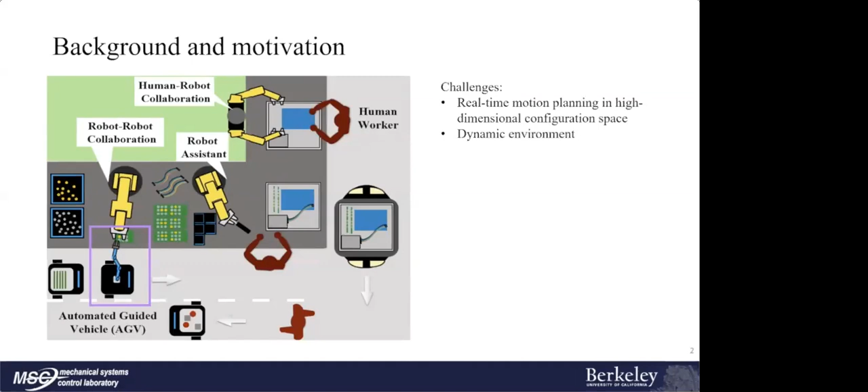There are two main challenges. One is that we need to solve a high-dimensional non-convex planning problem in real time. The other is that the robot needs to be able to deal with fast changes in the dynamic environment.

In this work, we solved the planning problem in a sequential convex programming manner. Here, we introduce the formulation of the convex subproblem. Denote the planning horizon as H.

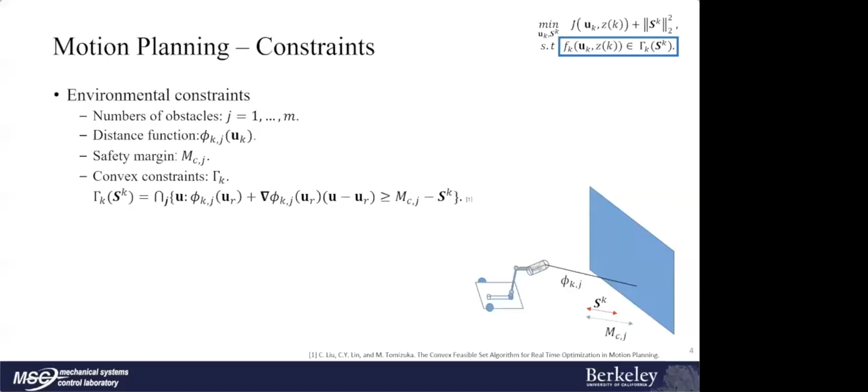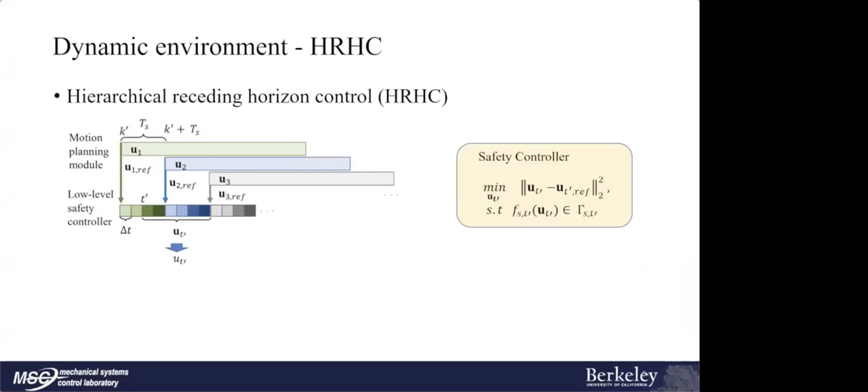To deal with dynamic obstacles, we introduce the hierarchical receding horizon control HRHC that combines the previous planning module with a safety controller that runs at a higher frequency. The safety controller reacts to rapid changes and projects the input from the motion planning module to a safe region.

In conclusion, HRHC enables the mobile manipulator to perform collision avoidance while completing its task successfully in both static and dynamic environments. Thank you for listening.

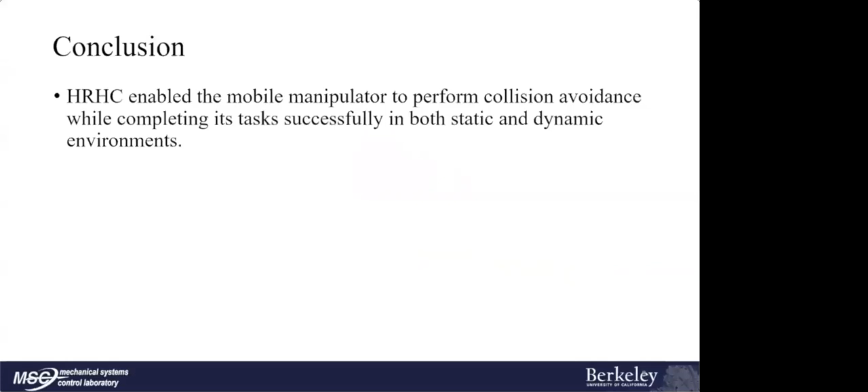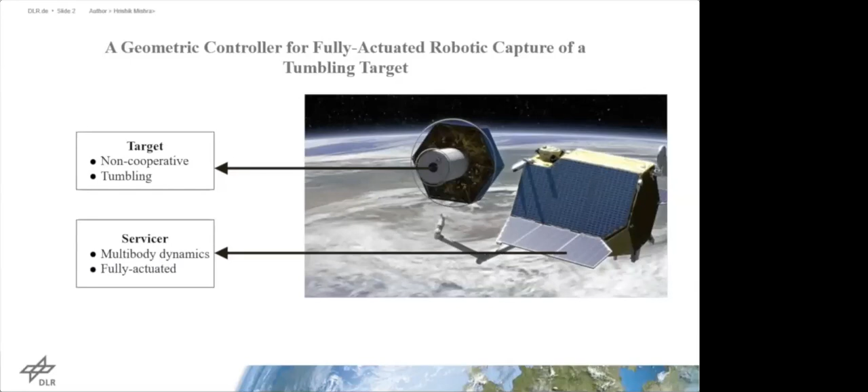The scope of this paper is the approach phase of missions concerning active debris removal and on-orbit servicing. In this phase, the servicer spacecraft has to synchronize with the tumbling target while the manipulator approaches to grasp a point on the target satellite.

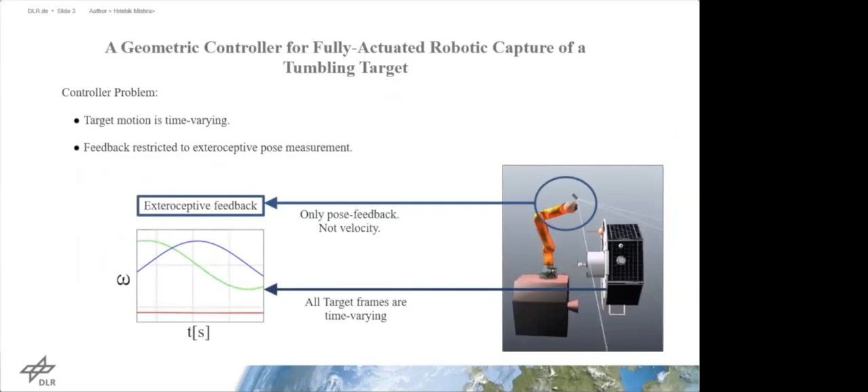From a control design perspective, we see that the reference frames on the target satellite are time varying, and yet the target state feedback on the servicer is limited to only a pose feedback sensor, for example a camera and its image processing. To address the issue of lack of velocity feedback, we propose the following architecture.

Firstly, note that the camera measurements capture the relative dynamics between the target and the servicer. In the paper, we propose a novel extended Kalman filter which uses the target model to estimate its motion states,

specifically velocity and acceleration. The filter states include the SE3 pose for the target configuration and its velocity twist. The estimated quantities are fed as both feedback and feed-forward terms to a nonlinear tracking PD plus controller.

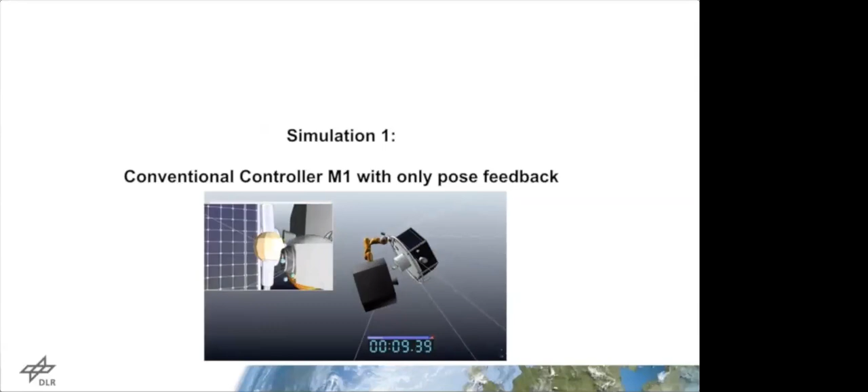Both the observer and the controller describe the corresponding configurations as SE3 group entities in contrast to Euclidean coordinates. In the paper, we show the limitations of a conventional controller, like noise sensitivity and steady-state errors of both spacecraft and end effector of the servicer.

The lack of velocity feedback may be compensated with high control gains, however this will increase noise sensitivity. Due to the feed-forward terms, the servicer spacecraft performs synchronous flight relative to the target. By doing this, the manipulator remains closer to the preferred configuration than if it were to compensate for the spacecraft errors. Therefore, we validated the effectiveness of the proposed method through simulation results.

Hello everyone, my name is Jamie from UT Austin. My presentation today will be on reachability-based trajectory optimization for robotic systems, especially given contact sequences.

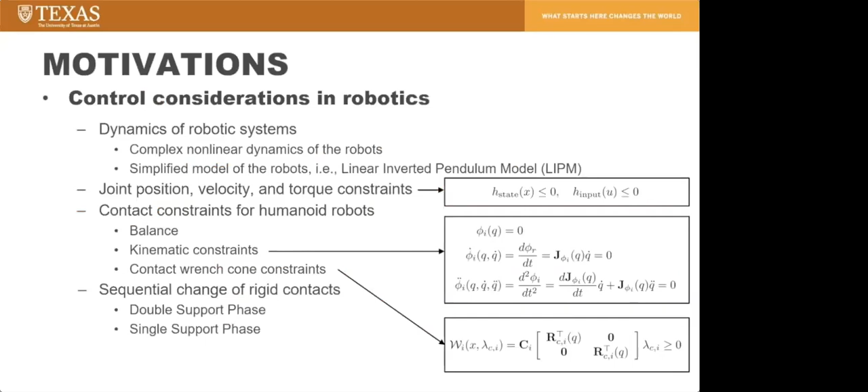When we control complex robotic systems like a humanoid robot, we have to consider multiple issues. First, full body dynamics is nonlinear; sometimes we use a linear inverted pendulum model for planning. Second, most robots have physical joint position, velocity, and torque constraints. Third, we consider kinematic constraints for contact and friction cone constraints.

We focus on the discrepancy between the planning and control models. For locomotion, we plan the center of mass trajectory and foot location with the TVR planner. However, we don't know if the planned result can be reproduced by the full-body robot due to the constraints. So we proposed a method to check if the planned foot location is reachable or not, and to optimize the trajectory for the whole body controller.

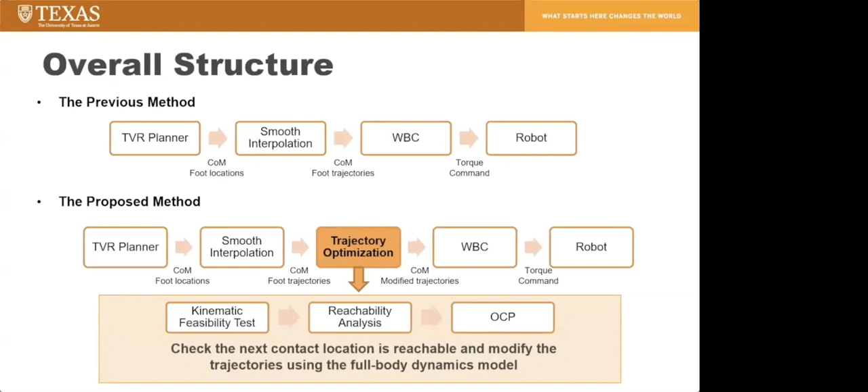In our previous work, we just planned the center of mass trajectory and foot location using the TVR planner and generated swing foot trajectory using smooth interpolation like a B-spline or cubic spline. Trajectories of the center of mass and foot are controlled by the whole body controller. However, this paper proposes an additional part consisting of kinematic feasibility test, reachability analysis, and optimal control for modifying the trajectory.

Also, we propose a method for obtaining forward and backward reachable sets in terms of the given contact mode. These methods are based on sample-wise optimization. For computing the forward reachable set, we draw random input samples satisfying the input constraint and solve the QP to obtain the joint acceleration. The initial state is propagated forward using this solution. Also, we can obtain the backward reachable set by drawing joint velocity samples satisfying the constraint.

Then, we check if there is a pair of input and contact force in the optimization problem. If yes, we can propagate the state backward; otherwise, we discard this sample. Based on the computed reachable set, we can test whether our states are reachable or not over a finite time horizon. Then we solve the formulated optimal control problem to generate a trajectory to change the contact mode. As a result, we can modify our foot trajectories for the whole body controller.

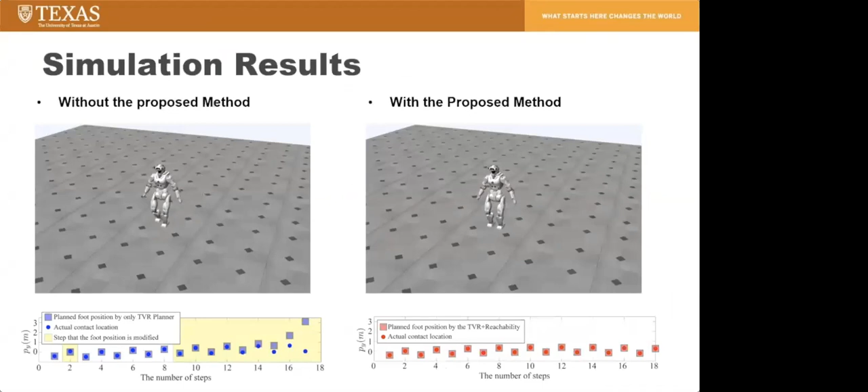These are numerical simulation results. We employ the same TVR planner and the same whole body controller. Without the proposed method, the TVR planner produces diverging foot locations. However, the proposed method can make more stable walking due to the optimized trajectory.

Let me briefly sum up the main contributions here. Thank you.